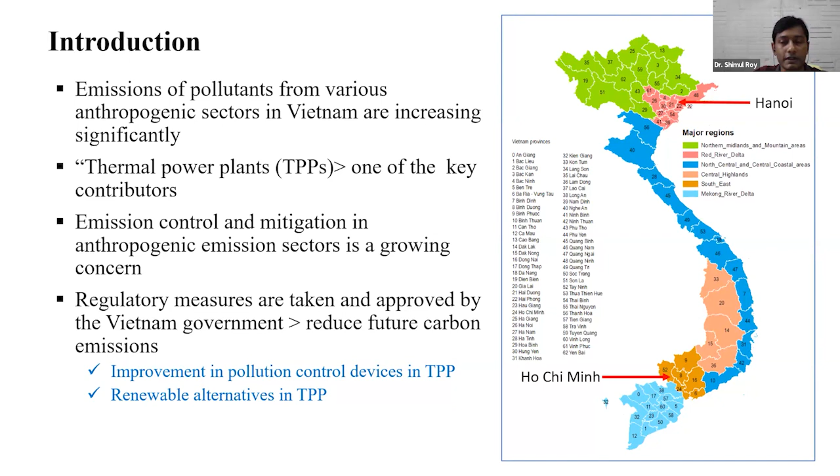Different regulatory measures are taken and approved by the Vietnam government in order to reduce future carbon emissions in Vietnam, including improvement in existing power sectors by installing different devices for controlling sulfur dioxide or NOx, and using renewable alternatives in the power sector.

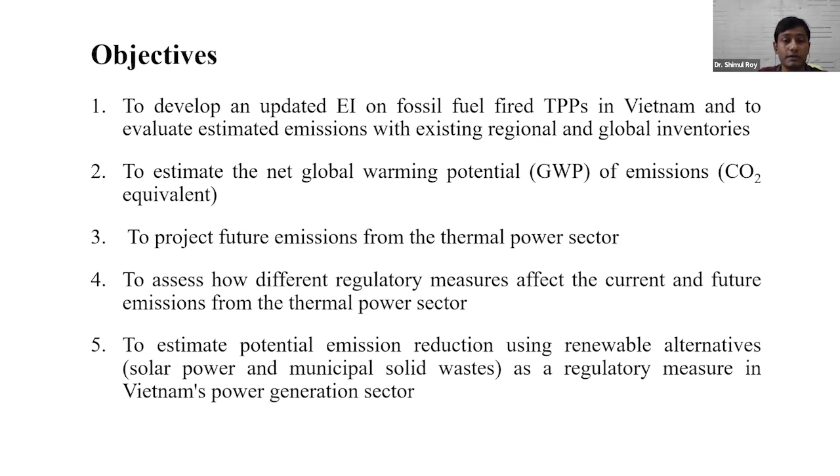These are the objectives of my research: to develop an updated emission inventory for the thermal power plants in Vietnam, and compare it with available global and regional inventories; to estimate the net global warming potential of emissions; to project future carbon emissions in the power sector; and to examine how different regulatory measures affect current and future emissions in terms of reducing carbon emission in the power sector.

Next, I will discuss the data and methodology used in this study. These are the different data sources used, collected from different local sources, personal communication, international databases, and different global and regional emission inventory databases.

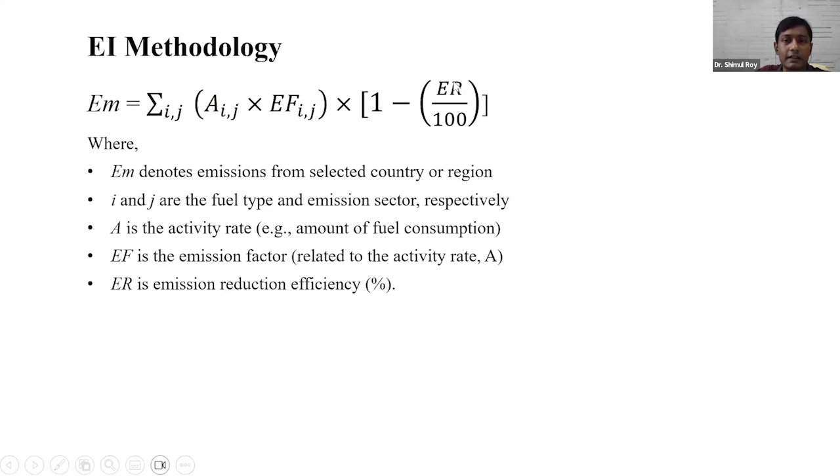Here is the methodology for estimating the annual emission from the thermal power sector in Vietnam. I considered the activity data, that means the annual fuel consumption in the power plant, the emission factor of different pollutants, and finally the emission reduction efficiencies of each individual power plant.

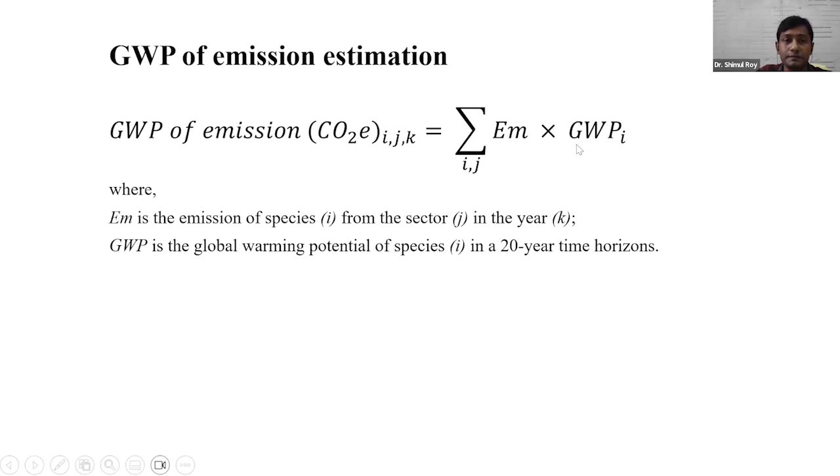This method is used for estimating the global warming potential of emissions, considering the annual emission from each of the power plants, and multiplying it with the global warming potential of the pollutants. Here is the overall scenario for the methods used for emission reduction using renewable and sustainable alternatives.

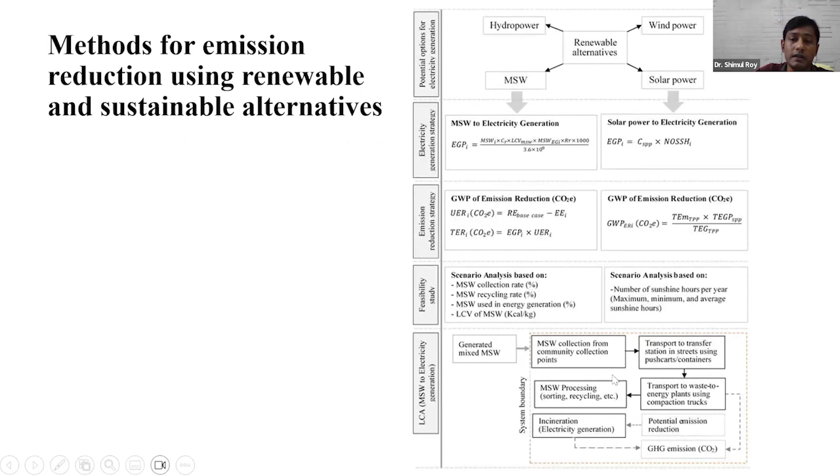In our study, we considered only municipal solid waste and solar power as potential renewable and sustainable alternatives to reduce future emissions in the power sector, using different equations. We also did a scenario analysis considering different factors, and finally we did a life cycle assessment for municipal solid waste to electricity production. Here is the system boundary for the life cycle assessment.

Turning to the next section, I'd like to discuss the results of our study. In Vietnam, thermal power plants are mainly clustered in the northern parts, mainly coal-fired power plants, while in the southern part they're clustered with gas-fired and oil-fired power plants. Here is the annual emission estimation for thermal power plants like coal-fired, gas-fired, and fuel oil-fired plants for different base years, 2015 and 2010.

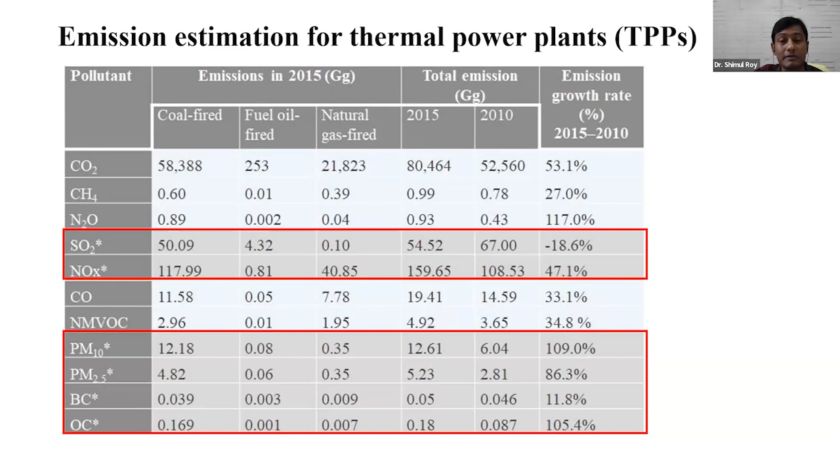The emission growth rate between 2010 and 2015 ranged from around 12% to 117%. The ash color represents power plants installed with different emission control technologies for sulfur dioxide, NOx, and particulate matter emission control. The emission growth rate for sulfur dioxide was negative, around -19% between this period, because by 2015 all of the coal-fired thermal power plants were equipped with FGD systems, the flue gas desulfurization systems, to control SO2 pollution emission.

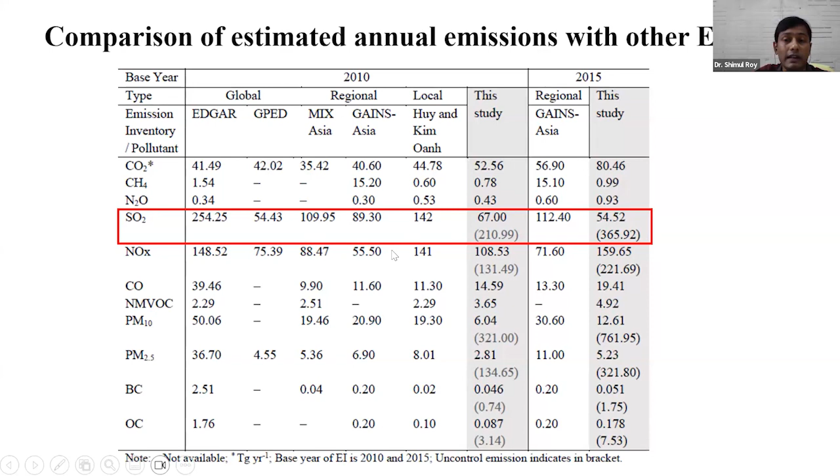This study also compared results with available databases that published global and regional emission inventories. Results show our estimates are comparable with available inventories, with some exceptions. For sulfur dioxide, our estimation was much lower compared to global and regional inventories, mainly because of the installment of emission control technologies. In this study we used a bottom-up emission inventory approach, whereas global and regional inventories mainly use a top-down approach without considering local activity data. That's the main reason for these differences.

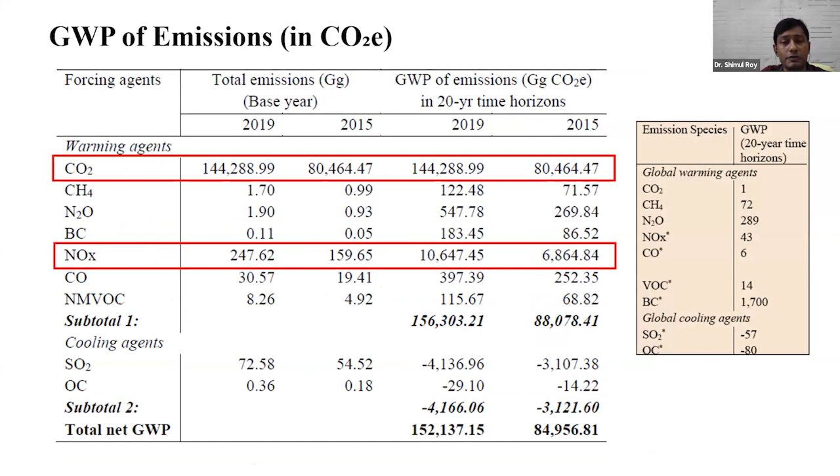We also estimated the global warming potential of emissions for different base years. Among the greenhouse gases, emission was highest from carbon dioxide, and for the short-lived climate pollutants, emission was highest from NOx.

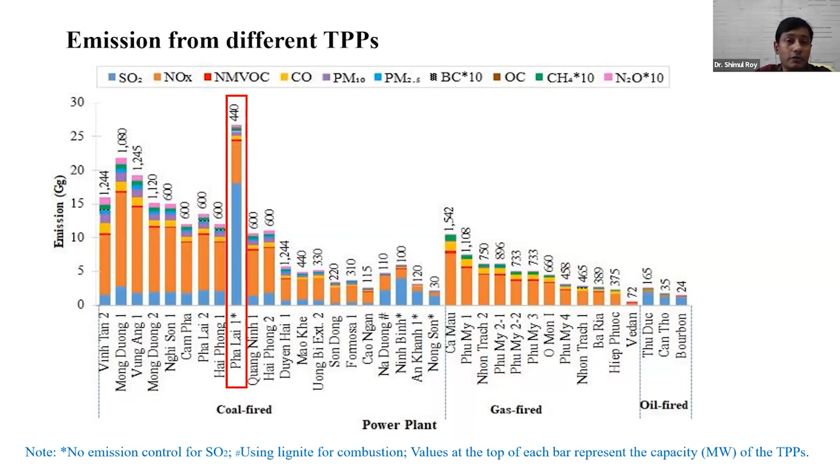This figure shows emissions from individual power plants in Vietnam in 2015. Among the 36 power plants, 21 were coal-fired power plants, and among those, emission was highest from the Pha Lai 1 power plant, because this plant did not install any sulfur dioxide emission control systems before 2015.

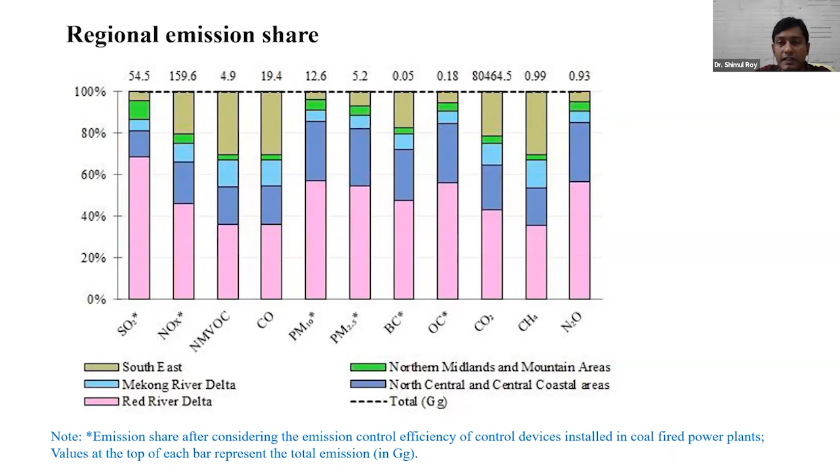This is the regional share of emissions in 2015. Among the 5 regions in Vietnam, emission contribution was highest from the Red River Delta region, the northern part of Vietnam, mainly because of the cluster of coal-fired power plants operating in this area, followed by North Central and Central Coastal regions, as between 2010 and 2015 a couple of new coal-fired power plants were installed in this area.

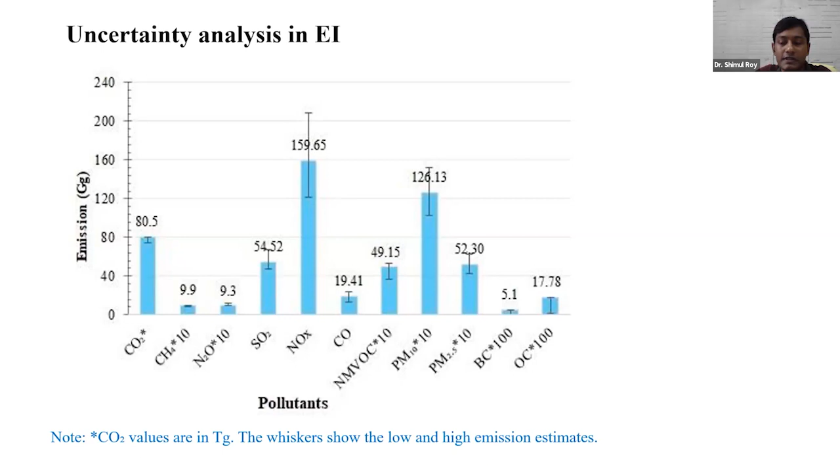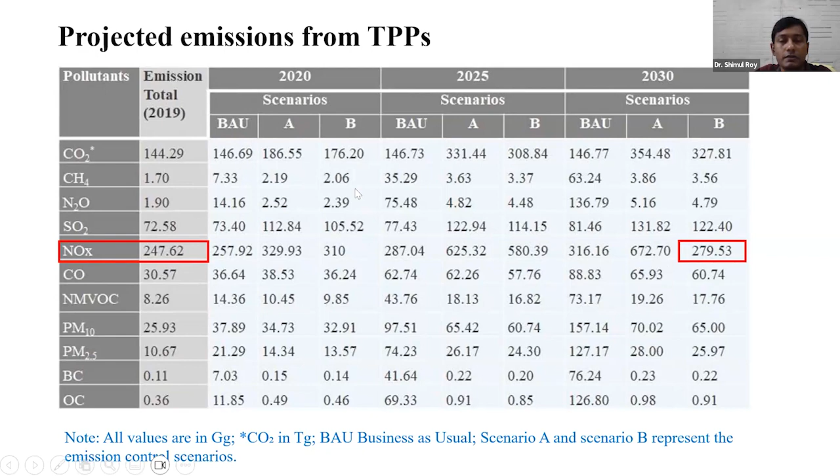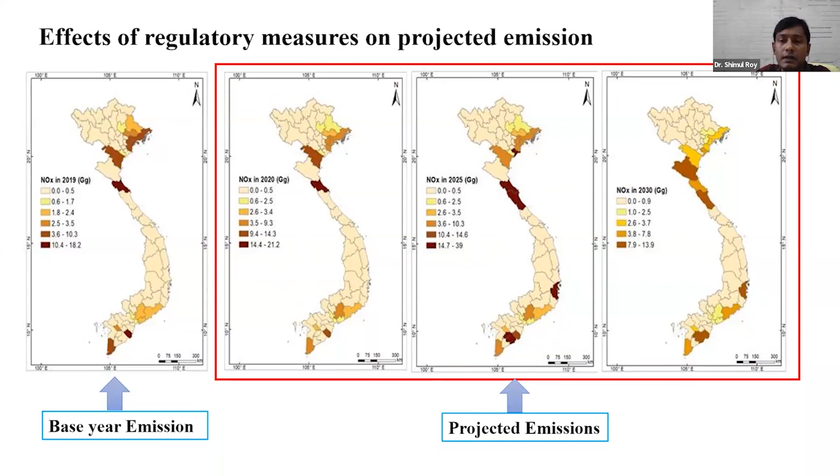In 2025, emissions changed drastically in the central part of Vietnam due to the installment of more coal-fired power plants. However, by 2030, emissions have reduced significantly as the government has taken different emission control technologies and approved projects to control future emissions, based on the COP21 agreement, the Paris Agreement.

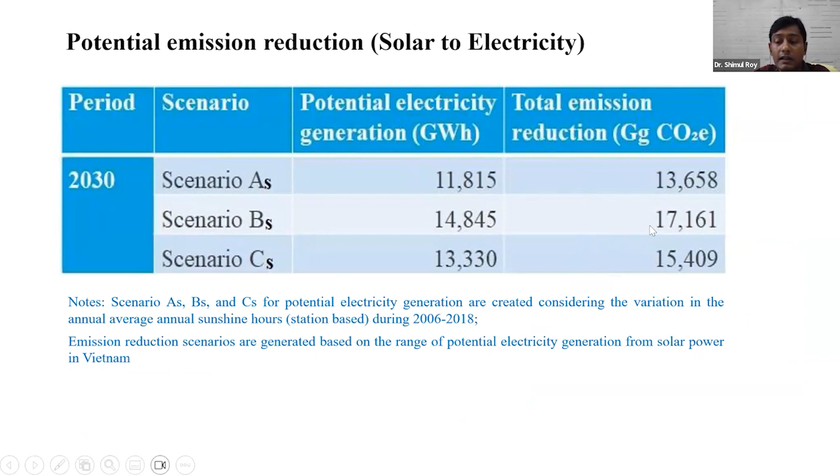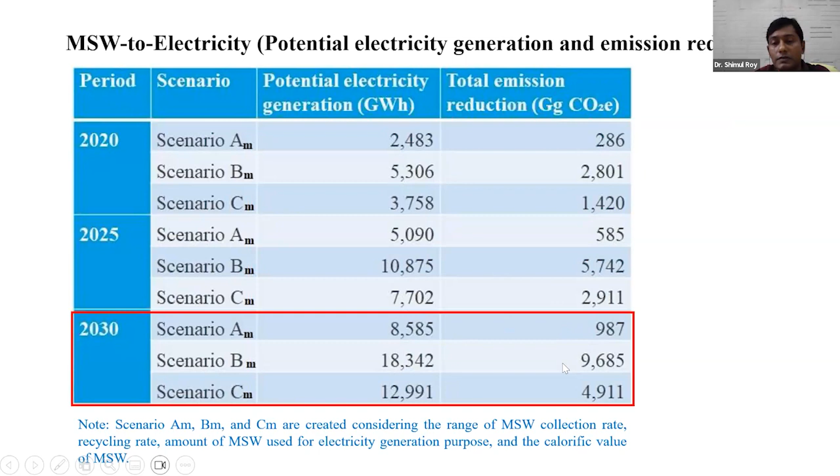In terms of municipal solid waste, potential electricity generation could range from more than 8,500 to around 18,000 gigawatt hours, and total emission reduction could range from around 1,000 to around 10,000 gigagrams CO2 equivalent.

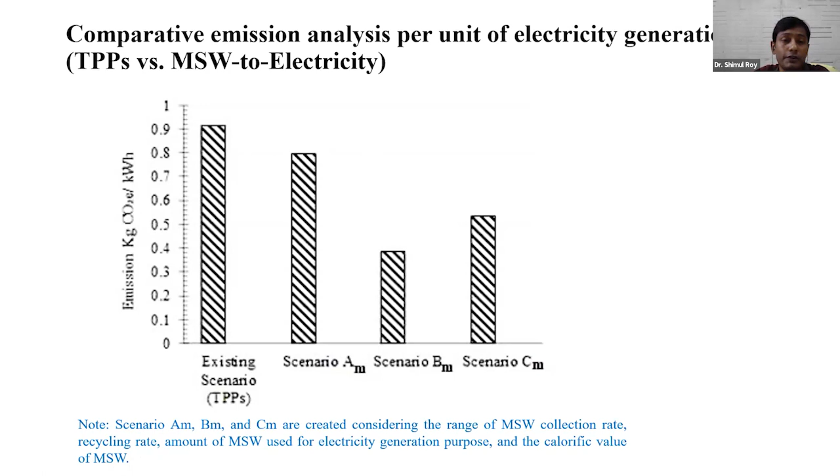In conclusion, in this study we developed and updated a new emission inventory with emission projections for the thermal power sector. Emission status will be the highest from coal-fired power plants until 2030, as the operation of coal-fired power plants will not stop until then.

The emission growth rate ranges from more than 8% to 340%. Emission was highest from the Red River Delta region, followed by North Central. There is potential reduction of NOx and sulfur emission in coal-fired power plants due to advanced technologies and strategies taken by the government.

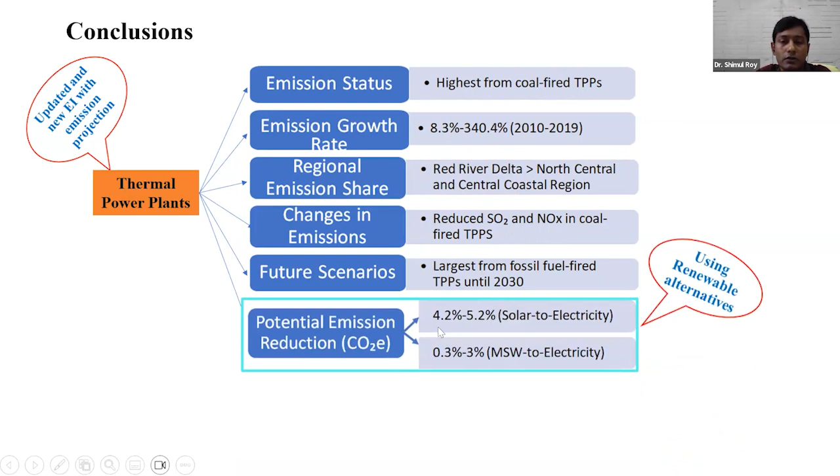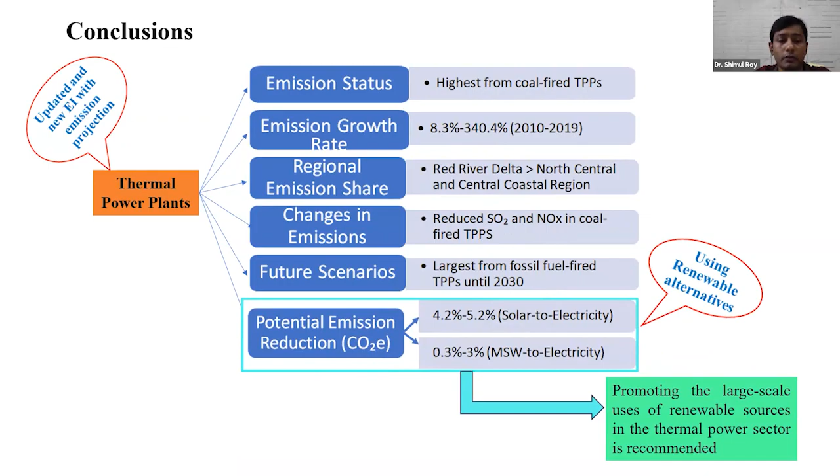This study also concluded that potential emission reduction is possible using solar and municipal solid waste through renewable technologies. Therefore, we suggest that promotion of large-scale use of renewable sources in the thermal power sector is possible for future decarbonization in Vietnam. Thank you all, this is the end of my presentation.

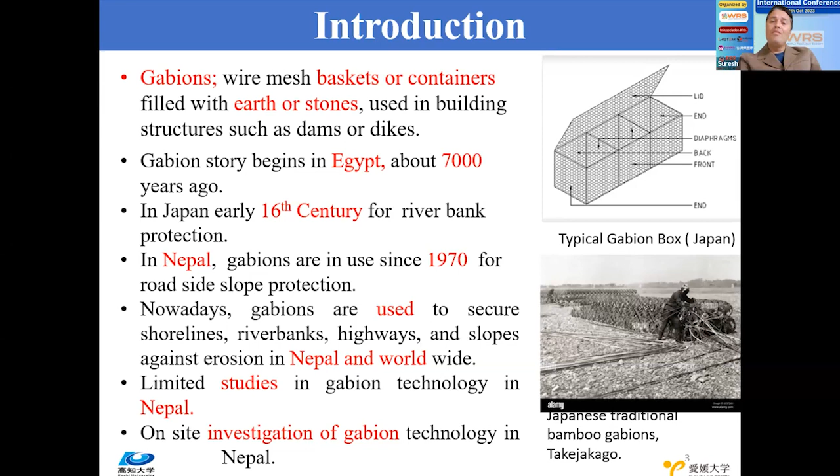So far, there have been very limited studies done on Gabion technology in Nepal and worldwide. So in this study, we conducted on-site investigation of Gabion technology in Nepal, to compare the prevailing Gabion construction and design practices in Nepal and Japan. These are the parameters that I want to compare.

In Japan, they apply very good standards of planning and design process, while in Nepal local practices are dominant. In Japan, hydrological, seismic, environmental, and geotechnical parameters are considered, while in Nepal only hydrological parameters are considered. In Japan, there is detailed topographic survey and right of way for channel considered during design and construction, while in Nepal only general topographical survey is considered.

So in the construction process, a very rigorous construction process has been done in the case of Japan with strict supervision from the gabion experts, while in Nepal they follow only the local construction practices. When we talk about the construction material used, in Japan high quality construction materials are used, good quality wires with zinc coating, similar types and sizes of stones, geotextiles are used, and there are varieties of gabion materials. Gabion boxes are available in the market as construction material.

But in Nepal, a very limited variety of gabion wire mesh is used, and mostly locally available materials are used, and these are mostly low quality materials used for the construction and design of the gabion. When we talk about durability, in Japan gabions are highly durable, around 40 to 50 years. In Nepal, within very few years they are damaged, and a maximum of 10 years durability is found in Nepal gabions.

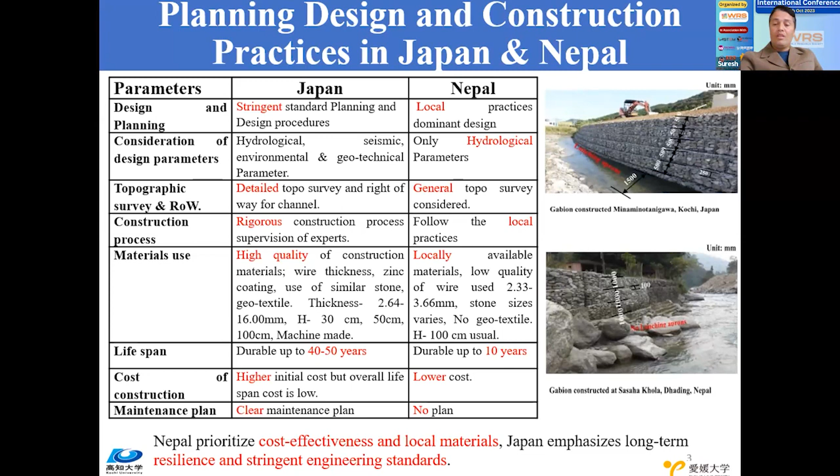When we talk about the gabion cost, there is a high initial cost in Japan, but the overall life span cost compared to the Nepal gabions is low. We found it like that. When we talk about maintenance, there is a very clear maintenance plan for Japan gabions, and there is not any operation and maintenance plan in the case of the Nepal gabions. So overall, Nepal prioritizes cost effectiveness and local material for design, while Japan emphasizes long-term and resilient engineering design.

So let me talk about the gabion design and construction methodology, which is done in Nepal. As I already told you, we did our investigation in the central part of Nepal in a small river. This is the Khar Khola River, where a total of 965 people and 250 households are affected. In this river, very few civil structures and embankments are provided, and every year the flow overtops the bank of the river, floods the nearby area, and damages the infrastructure and agricultural land nearby. We also installed a rain gauge station in that area, and as per the data observed from 2022, around 2,000 millimeters of rain fell in that area.

So from the hydrological analysis, we found that the high flood level for the river is 3 meters for the 100-year return period, and 2 meters for the 30-year return period. We considered the river width as 18 meters. In our research, what we really focus on is the problems in the gabions in Nepal. They are less durable, damage is fast, they are very unstable, and there is no stringent standard of design and construction practices in Nepal. That is the main problem in Nepal that we see, and we want to focus and investigate on that.

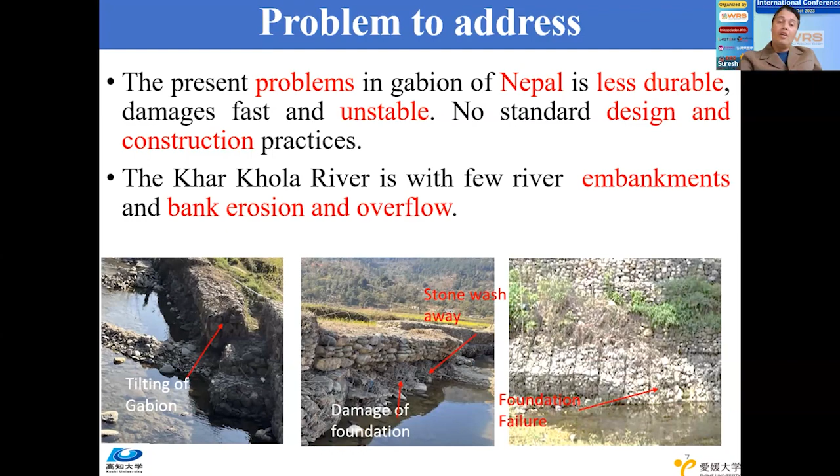So the Khar Khola River has very few embankments, and there is bank erosion and overflow every year. Here you see in the figure there are some gabion embankments provided, and you see the tilting of the gabion from the top part, damage to the foundation of the gabion, the washing away of stone from the foundation, and also foundation failure in the provided revetment gabion structures in the river.

So to investigate the river, we did some geotechnical soil analysis. We collected samples from the river and did the sieve analysis. From the sieve analysis, we found that the topsoil consists of 9.4% fine particles, while the middle and bottom soil has only 1% fine particles. As for the grain size analysis, the foundation soil is around 80% gravel. This is the soil structure we found from the sieve analysis.

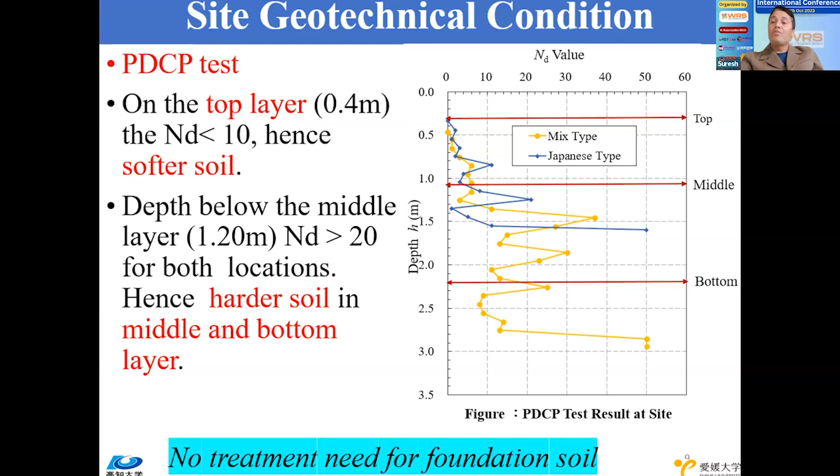After the sieve analysis, we did the portable dynamic cone penetration test on site. From the PDCP test, we found that the top layer is soft soil, and in the middle and bottom layers we found hard soil. So from this geotechnical analysis, we found that the foundation and middle part of the soil is hard soil. So there is no need for any foundation treatment for providing any type of structure in that soil. So how we did the PDCP.

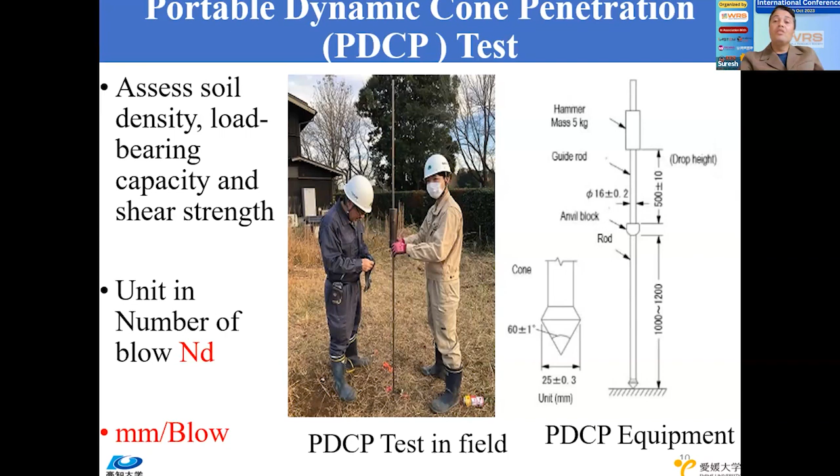This is the PDCP method, which we used to find out the soil density, load bearing capacity, and shear strength. This just shows you what PDCP is and how we did the PDCP test in the field.

So after doing this soil geotechnical analysis, we developed a new design concept, a gabion concept that is suitable for Nepal. How we did it is, first we selected the site, then we finalized the design from a series of discussions with experts from different sectors, involving the local people. Then we developed two types of design for that site. One is a Japanese type design, and another one is a Japanese and Nepali mixed type design.

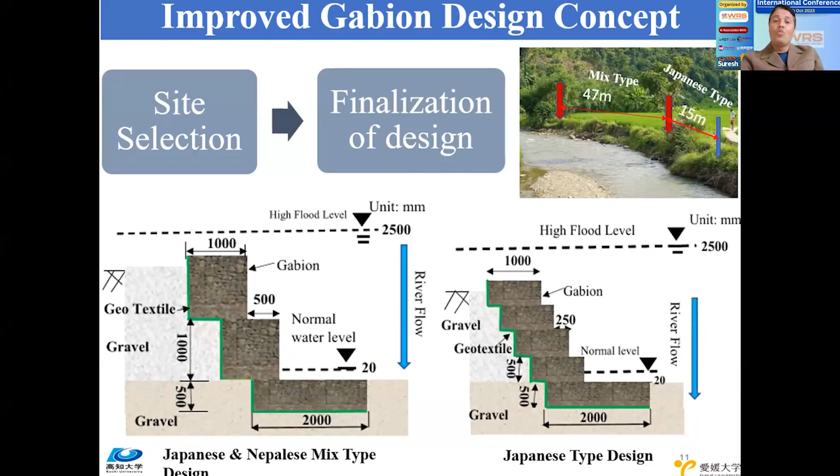How we developed this is we involved some good standard parameters and practices from Japan, and some local practices of Nepal. So these are the two designs we developed and investigated at the site. Why we chose Japanese design for Nepal is because the Japanese have very long-term, resilient, and stringent design and standard construction processes. They use very good quality construction materials.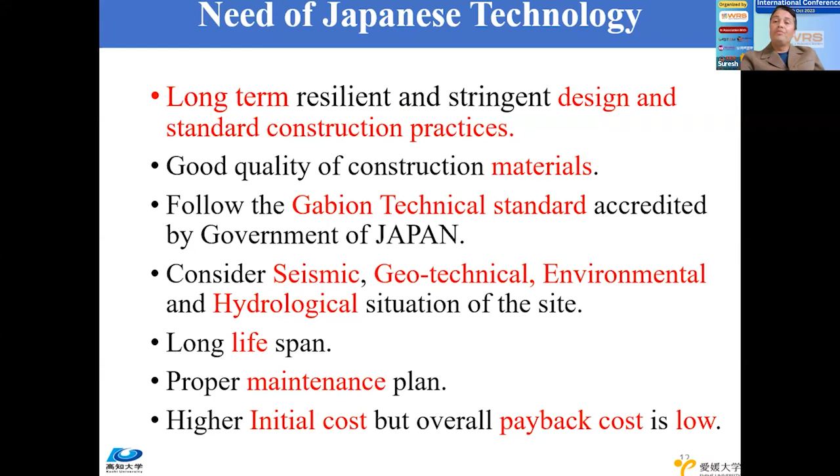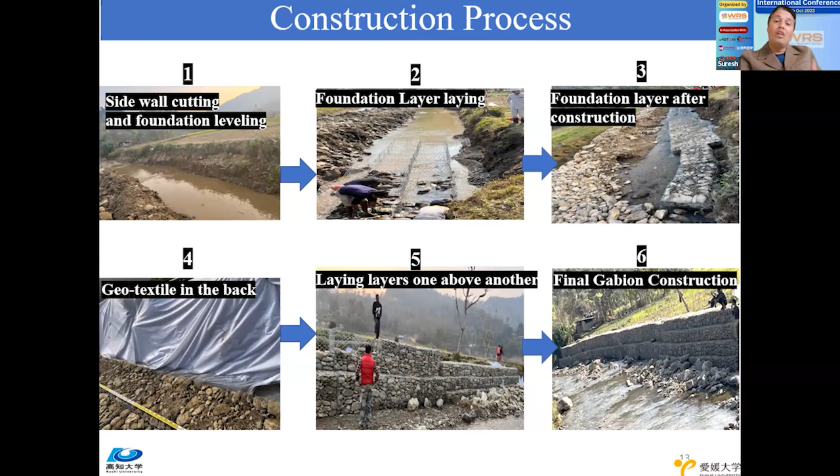They follow the technical standard that is accredited by the government of Japan. They consider the seismic, geotechnical, environmental, and hydrological situation of the site. These gabions are highly durable. They have a good maintenance plan, and even though the initial investment cost is high, the overall payback is low. That is why we follow the Japanese gabion system and practices in our technology. This is the construction process that we followed at our investigation site.

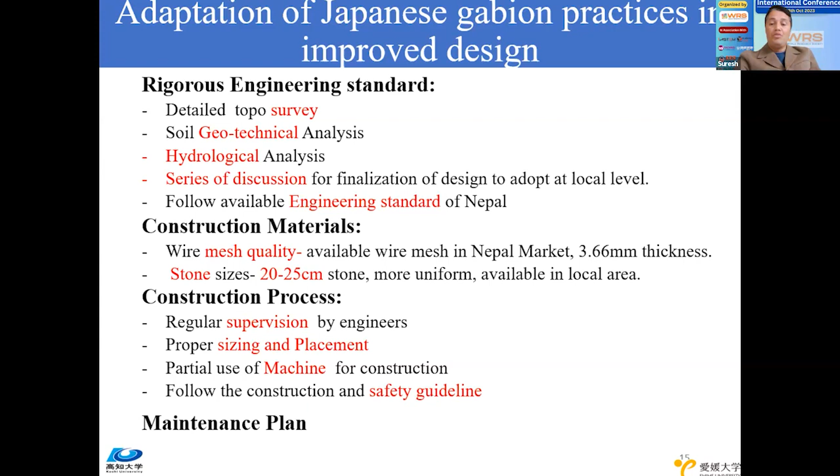So after the investigation, I will talk about our results and discussion. What we found about the adaptation of Japanese gabion technology is that we follow rigorous engineering standards: we do a detailed topography survey, soil geotechnical analysis, hydrological analysis, and a series of discussions to finalize the design to adapt at the local level. We use locally available construction materials. We follow a rigorous construction process like regular supervision, proper sizing and placement, and use of machines, and then we use a maintenance plan.

Talking about construction easiness, for the Japanese type construction training is needed for the workers, but for the mixed type, because of the 100 centimeter height, which is mostly used in the Nepal system, workers with very little training can construct this type of design. Talking about the cost of construction, the Japanese type design is costlier than the mixed type design. And for both systems we apply a maintenance plan by the community.

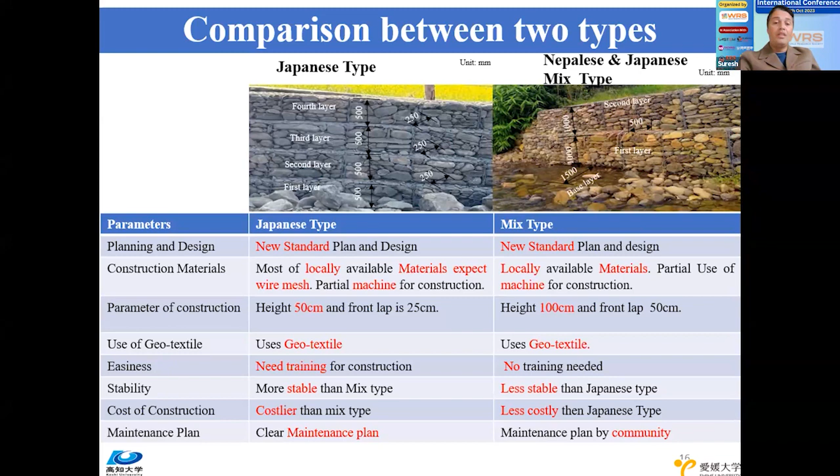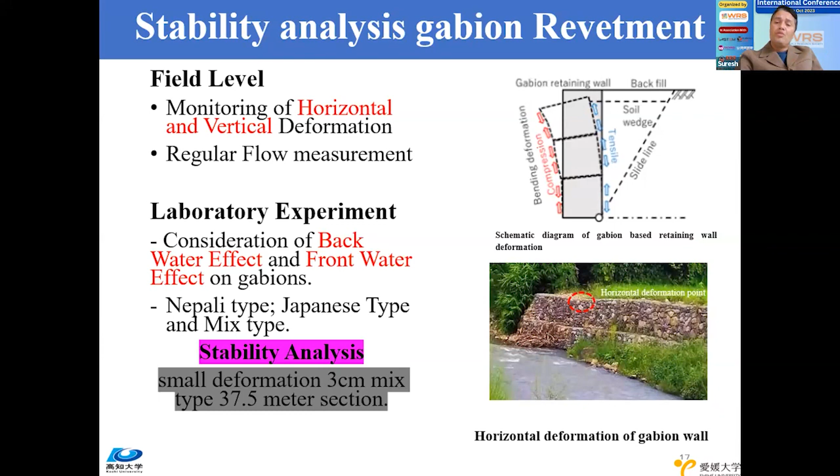After construction, we measured the horizontal and vertical deformation of these two types of design installed at the site every month after March. From the data, we found very little deformation in the mixed type design, only 3 centimeters, which is negligible compared to the other system. So that is what we found. Now I would like to conclude my presentation with the research findings.

Overall, gabion technology is a cost-effective and environment-friendly solution for flood control and erosion control, widely used in many parts of Nepal and other developing countries. The improved gabion technology seems to be the most effective, durable, and adaptable for Nepal and similar countries. We will further analyze the best possible gabion options and construction technology options suitable for Nepal and similar contexts.

We are doing regular monthly monitoring at the site and also in the lab for both types of design. After the results from the lab and the site, we can analyze and recommend the best possible option for the revetment system. Thank you everyone for listening.